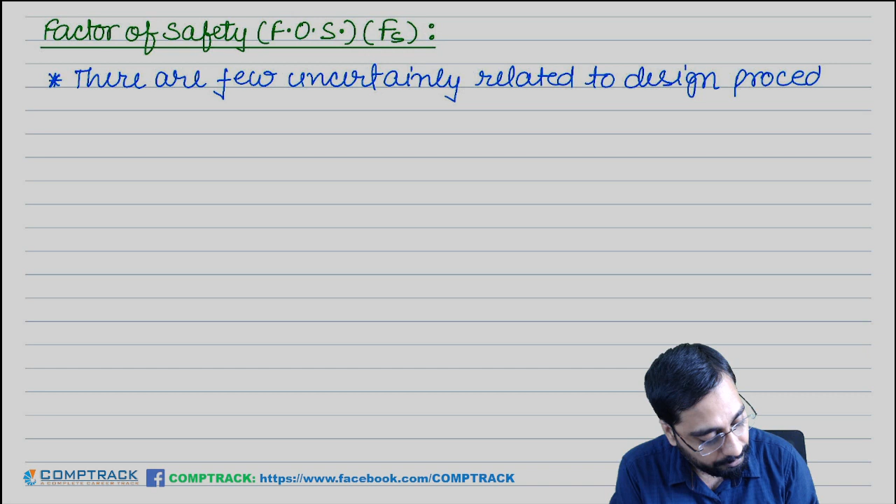There are few uncertainties related to design procedure, like first, uncertainty of load.

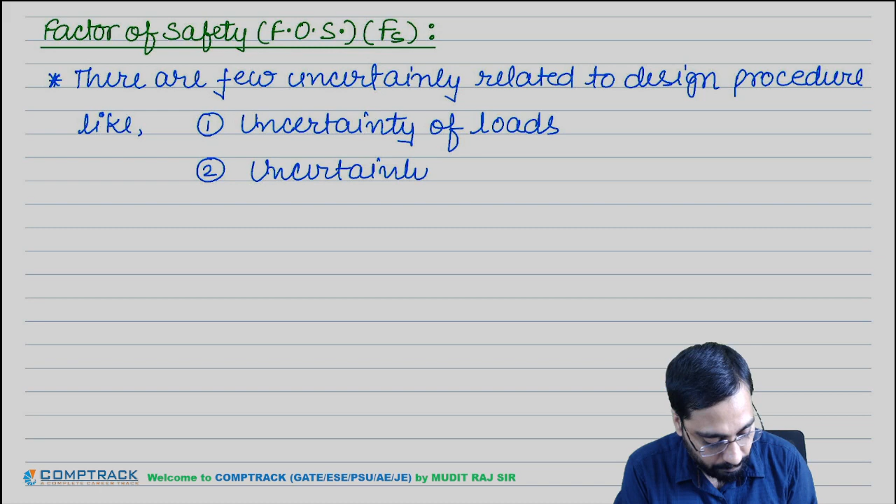Second, uncertainty of dimensions and size. Third, uncertainty of material.

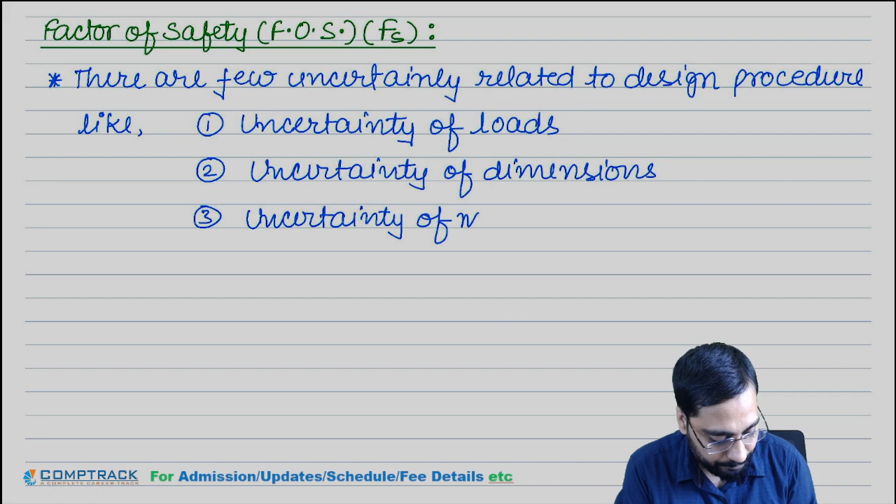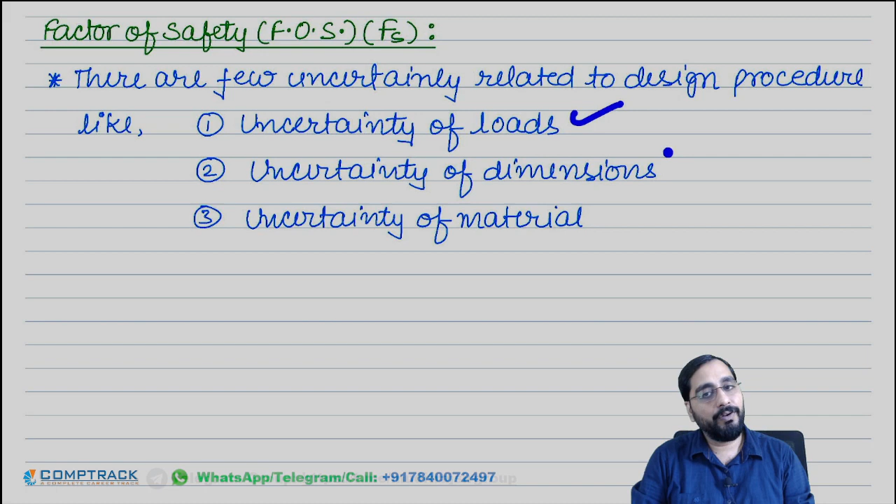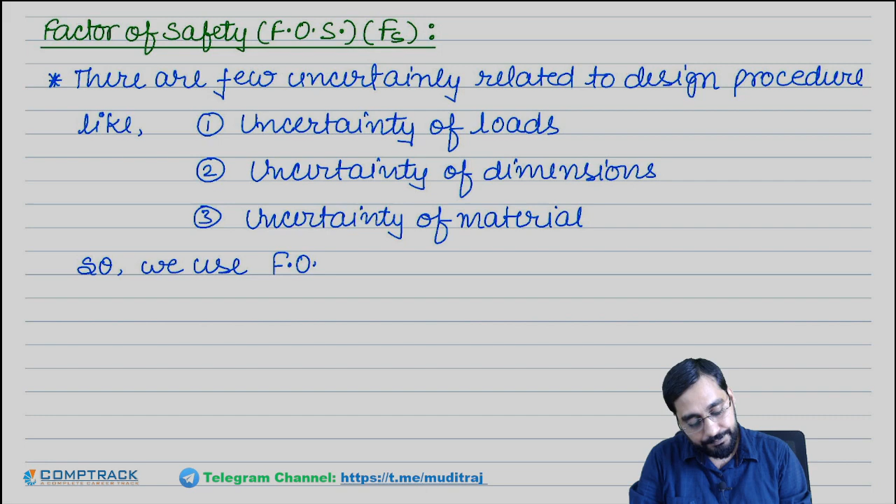So we cannot exactly predict the load, we cannot exactly manufacture the exact dimension, and we cannot have the pure material. So we use factor of safety to provide some reserve strength.

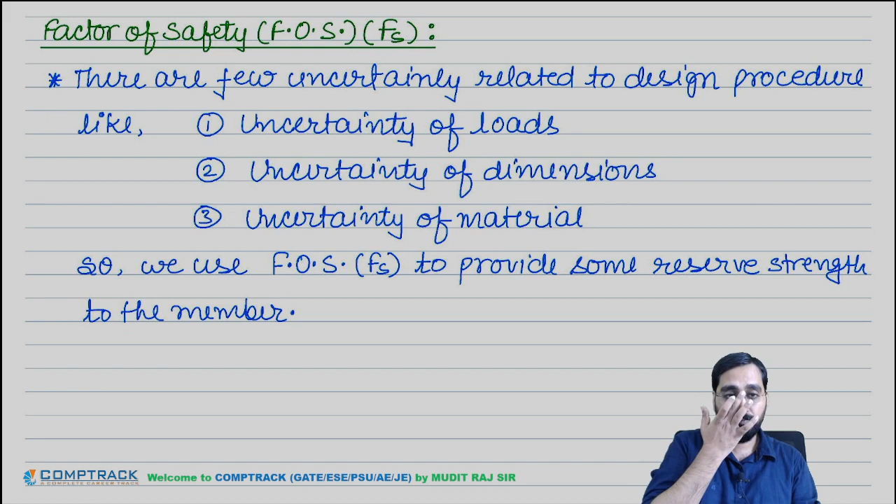To the material or member. What is the reserve strength? Reserve strength is like in your bike or car, there is some reserve condition.

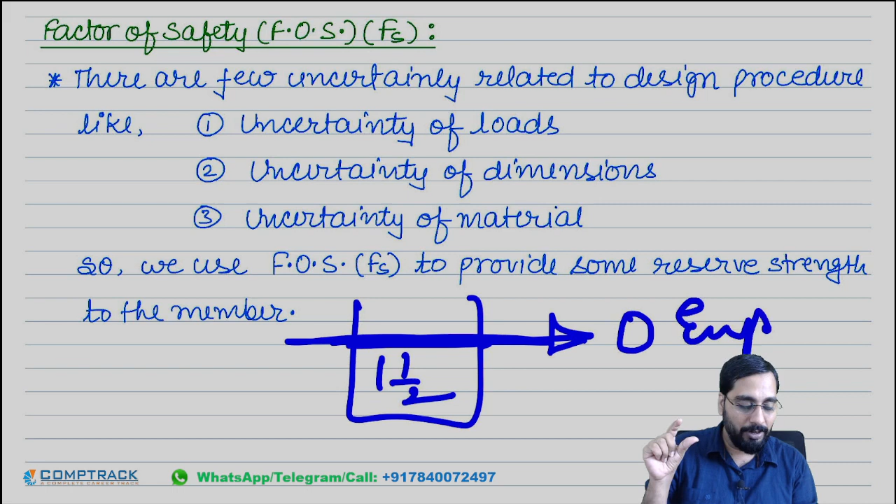Before emptying the diesel tank, some diesel will always remain, let's say 1 liter or 1.5 liter, and the meter will show zero, empty. Your car tank is empty, so this is the reserve quantity, reserve volume of the diesel or fuel inside the vehicle. So here the vehicle will count 0. So this is the reserve volume of diesel.

This much should remain, because sometimes you are on the highway and the nearest petrol pump or diesel pump is far away. So if your fixed distance is 300 kilometers and you are putting fuel for only 300 kilometers, you are a very efficient engineer. So for that there will always be some reserve.

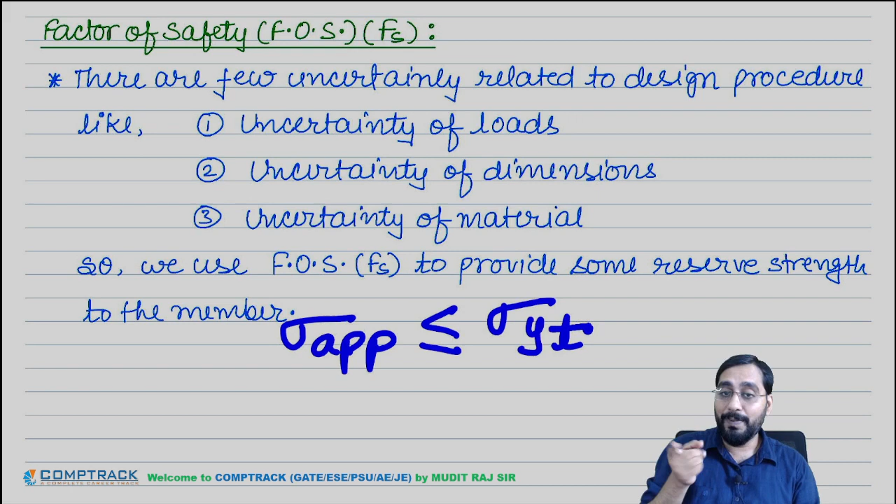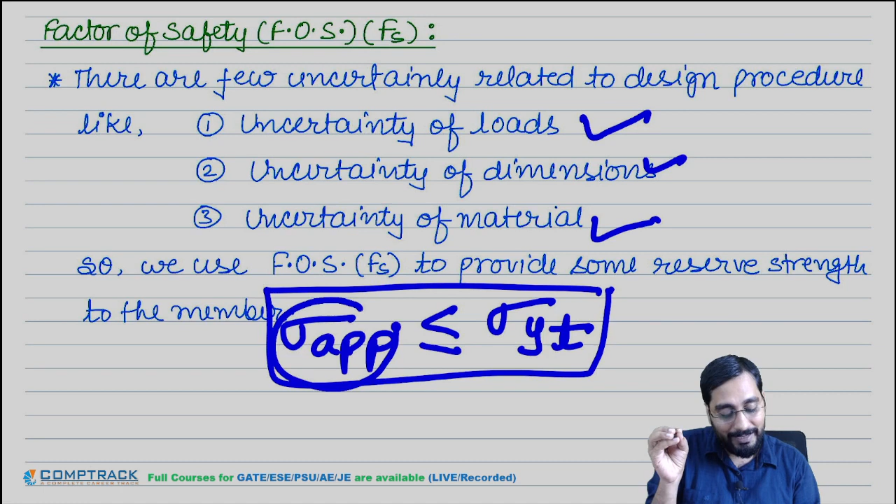So reserve strength means actually you can apply the applied stress less than or equal to, let's say for ductile material, yield strength. But due to uncertainty of load, material and dimension, we will not go up to this. We will apply stress lesser than this value.

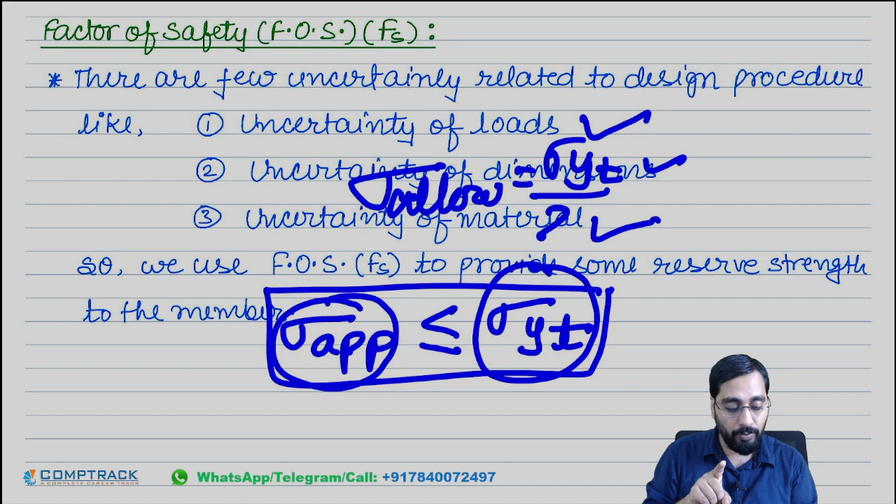So our allowable stress, the designer will set, as a designer you will set the allowable or permissible stress, let's say only sigma YT by 2. Then applied stress you can apply only up to that by 2. That's it. So for a factor of safety of 2, there will be much more safety.

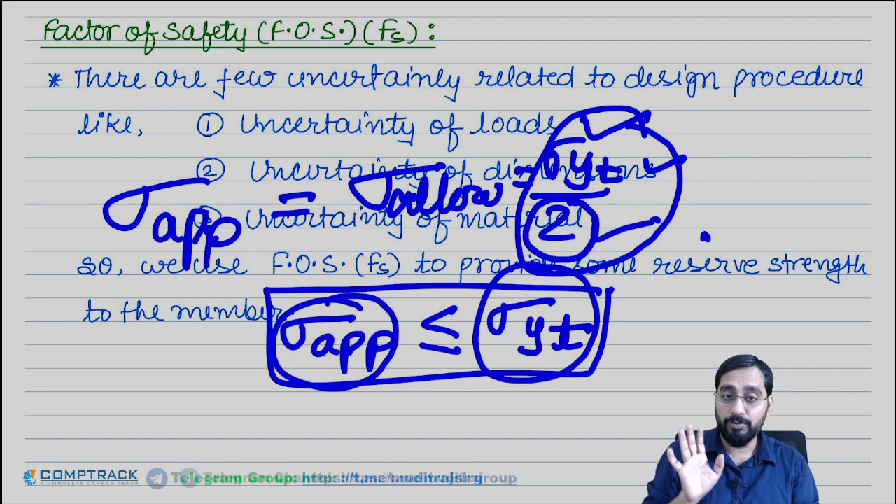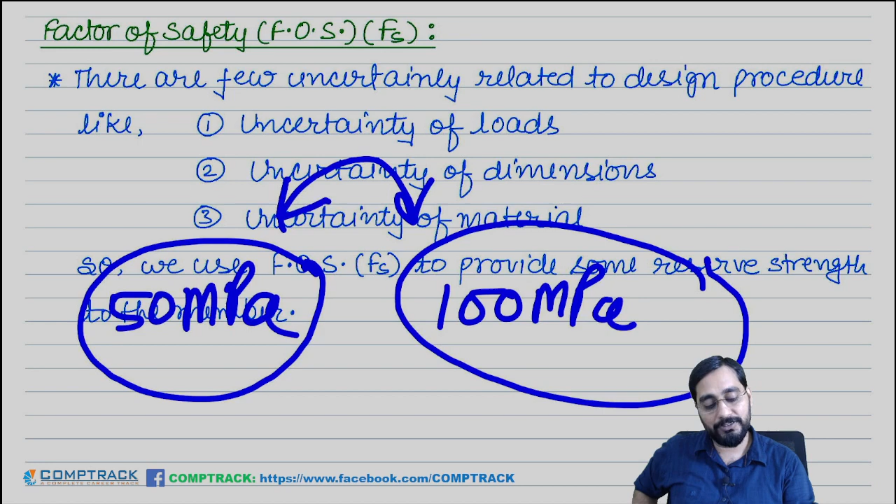Let's say you can go up to 100 megapascal, but you will be allowed only up to 50 megapascal. So the maximum up to which you can go, and what you are allowed, this difference is called your reserve strength. So here,

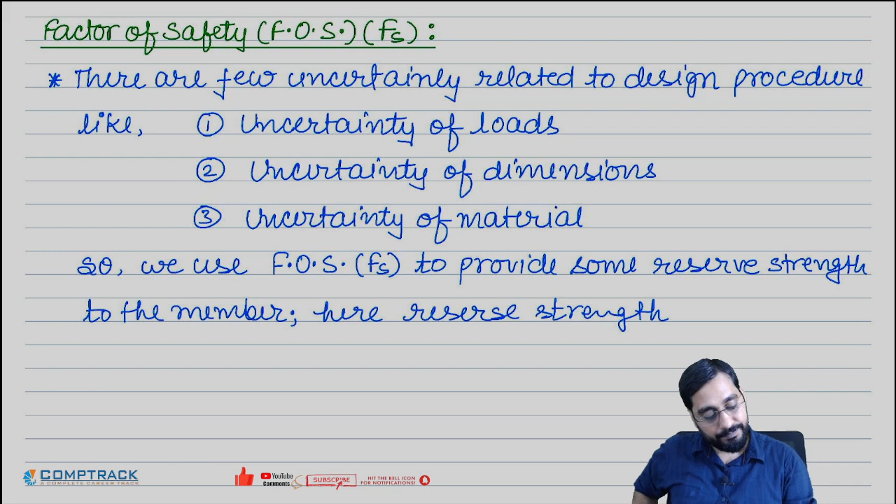reserve strength is sigma strength, or you can say maximum, minus sigma allowable. That's it.

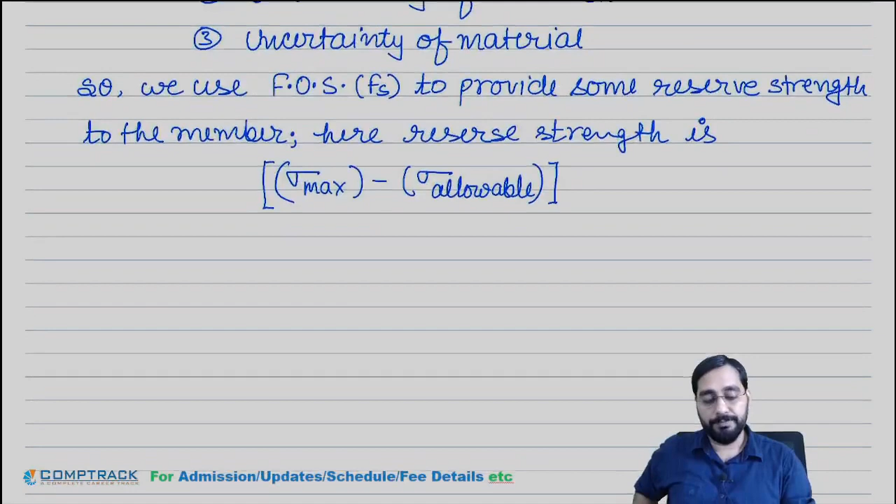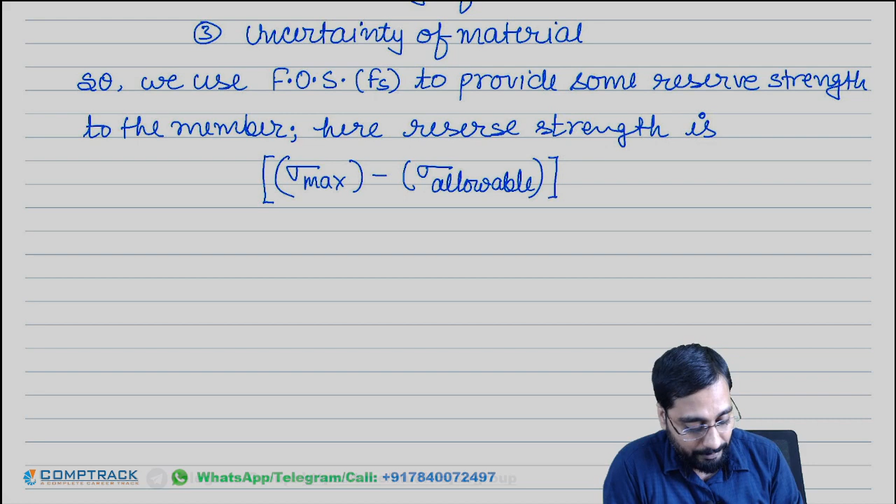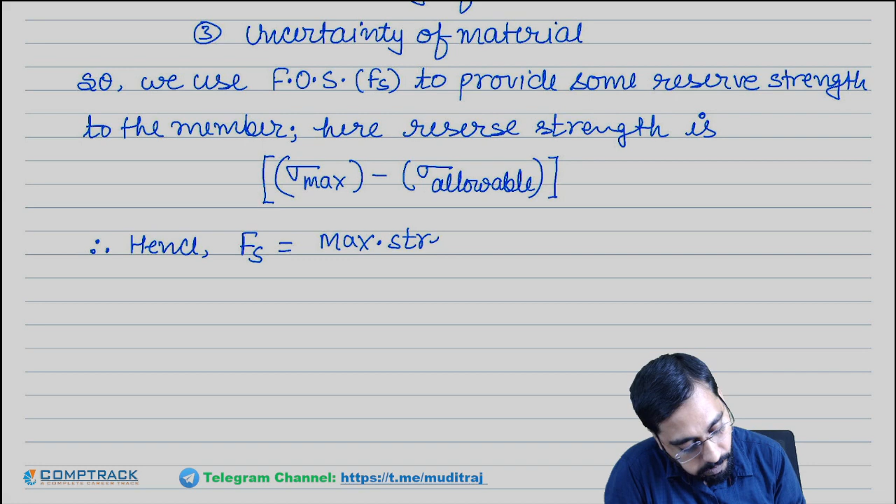Allowable. Now factor of safety. So the factor of safety formula will be given by what? Factor of safety formula will be equal to the maximum stress upon the working stress or applied stress.

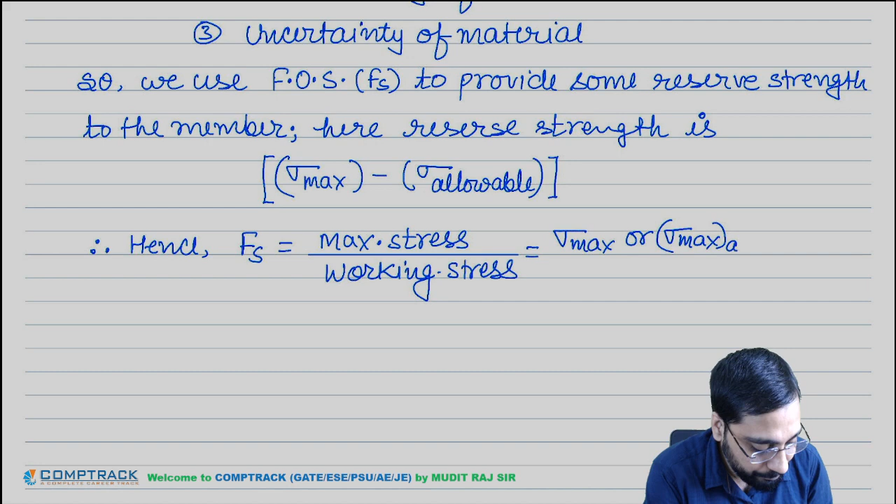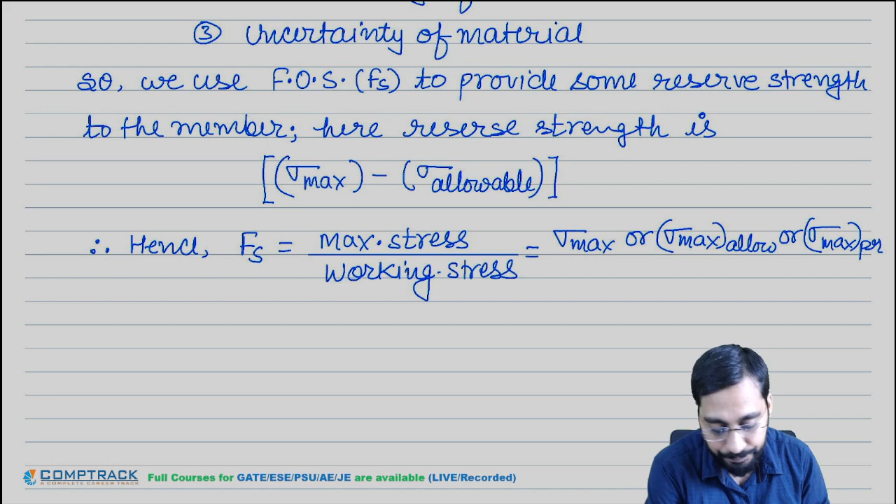or you will write sigma maximum permissible, divided by sigma working, or you can say sigma applied, or you can say sigma induced. Got the point or not?

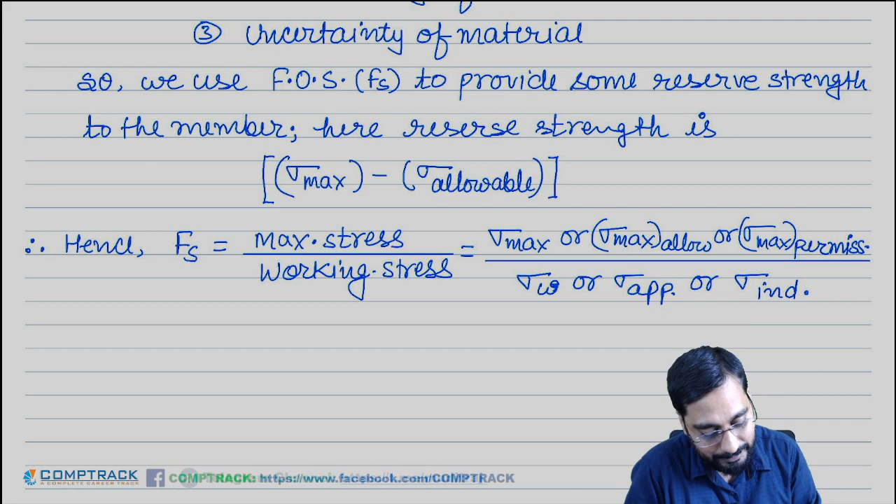Sigma induced. Okay sir, here sigma maximum is yield strength in case of ductile material. Yes, in case of ductile material, this sigma maximum will be sigma YT.

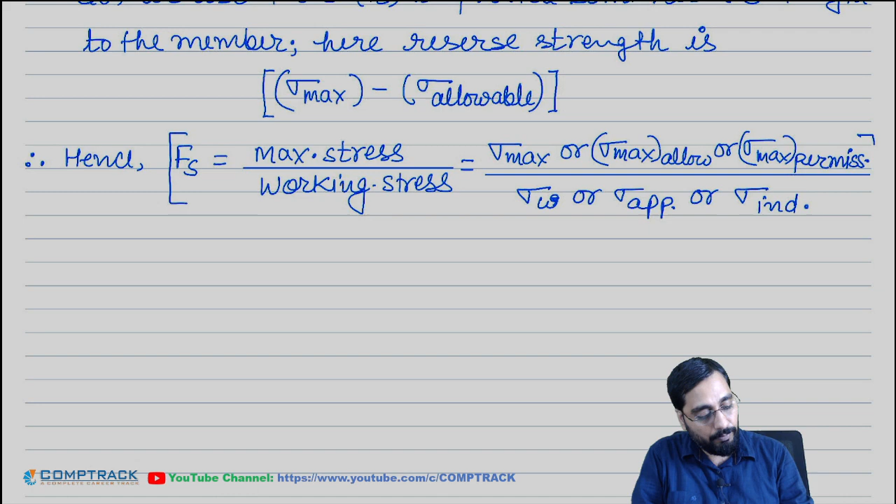So here you can see that factor of safety will be more than or equal to 1 always.

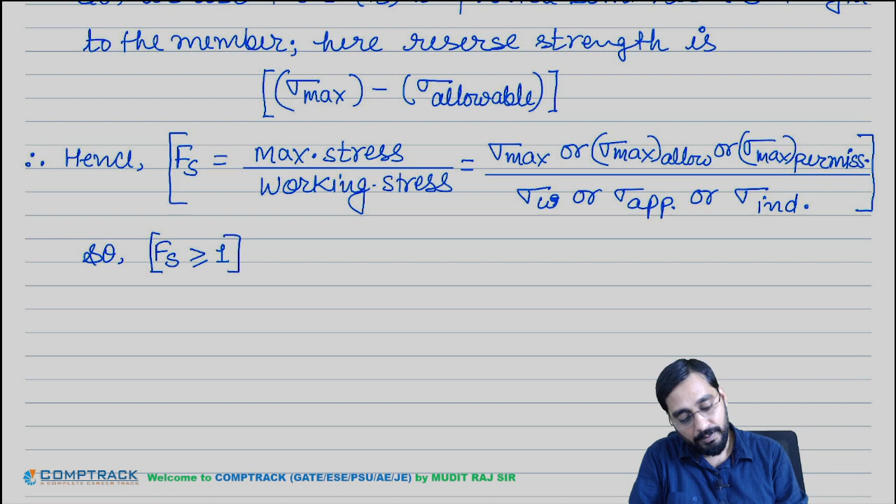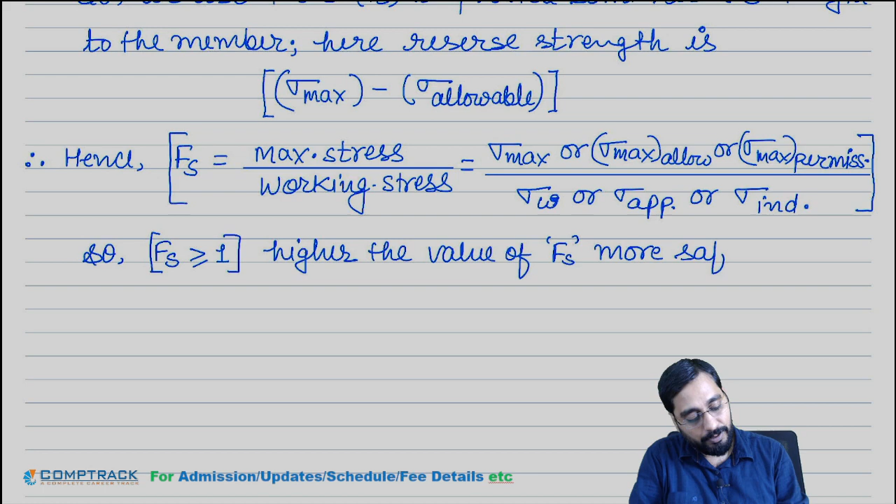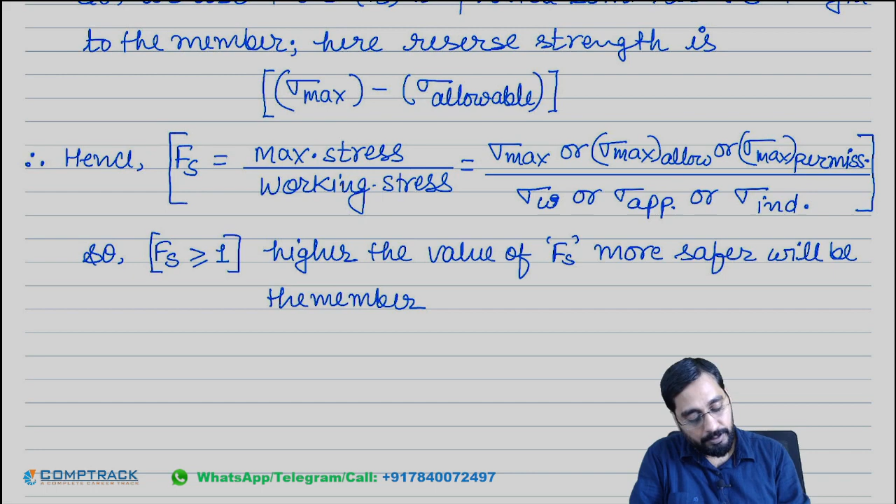Equal to 1 doesn't really make sense, but FS will be more than or equal to 1 always. Higher the value of factor of safety, more safer will be the member. Yes or no? When factor of safety will be higher, more safer will be the member or element.

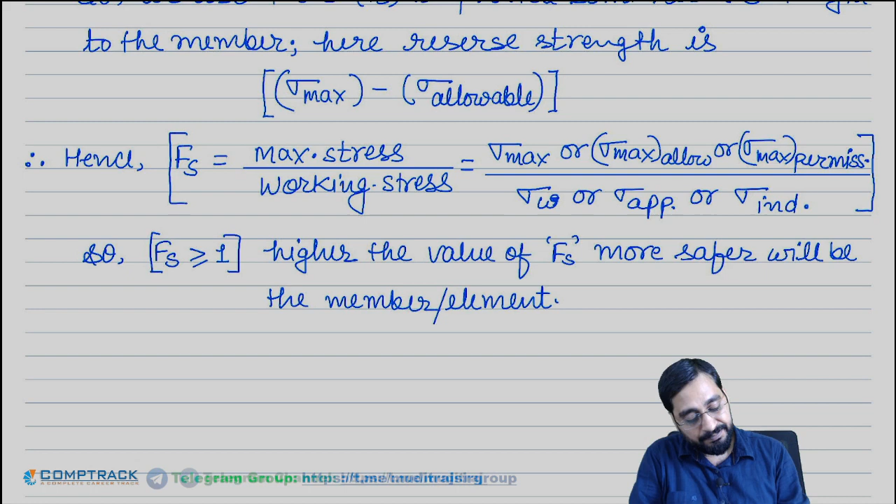No. Why? When you are increasing the factor of safety, then you will increase the dimension of the member, or you will decrease the load.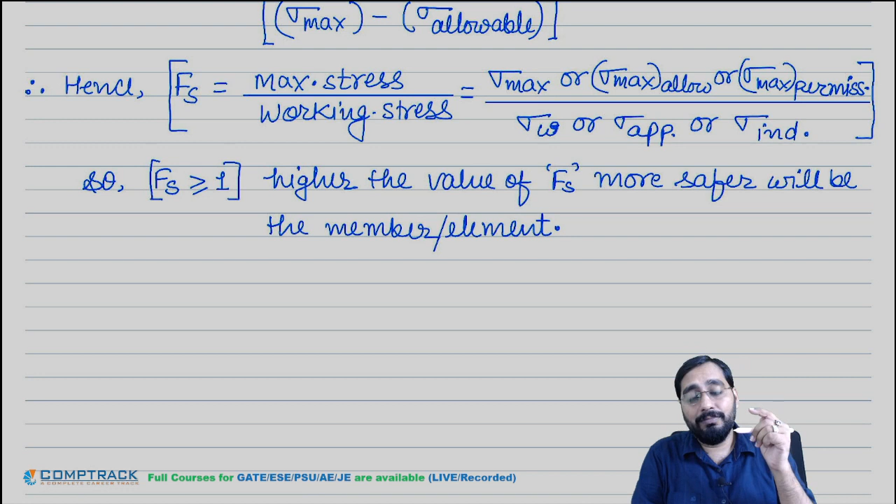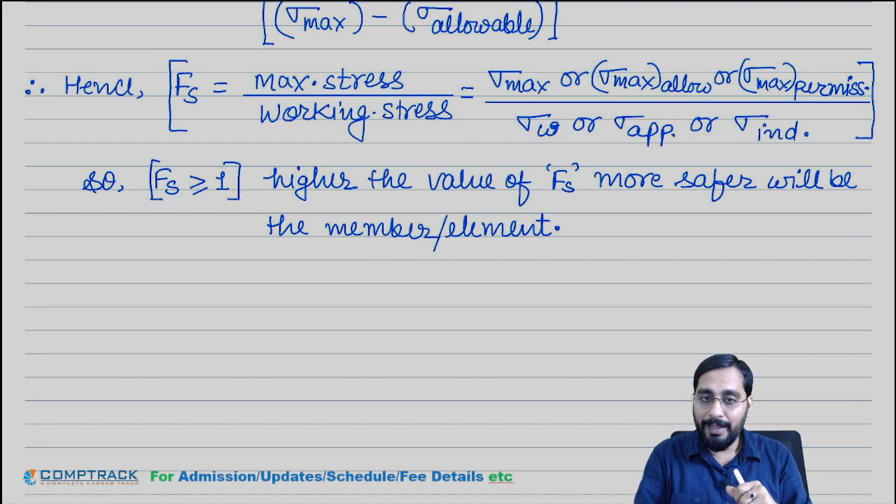Yes or no? So if load is decreased, then the process will not be efficient for us, because your machine can take only less load. And if you are increasing the dimension of the shaft or element, then more material you are using, so more cost will be there, and more weight of the machine part will be there, so mileage of the car will go down.

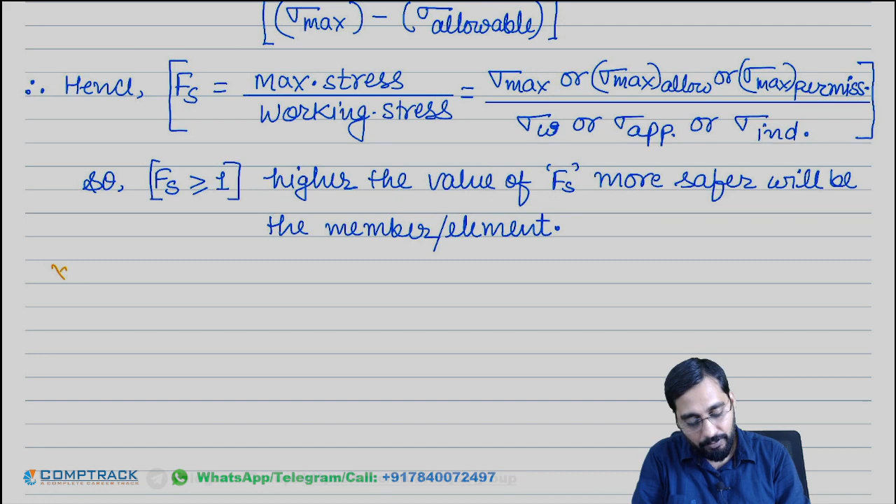Yes or no? So we cannot keep on increasing the factor of safety. So write down here, higher value of factor of safety is good, but

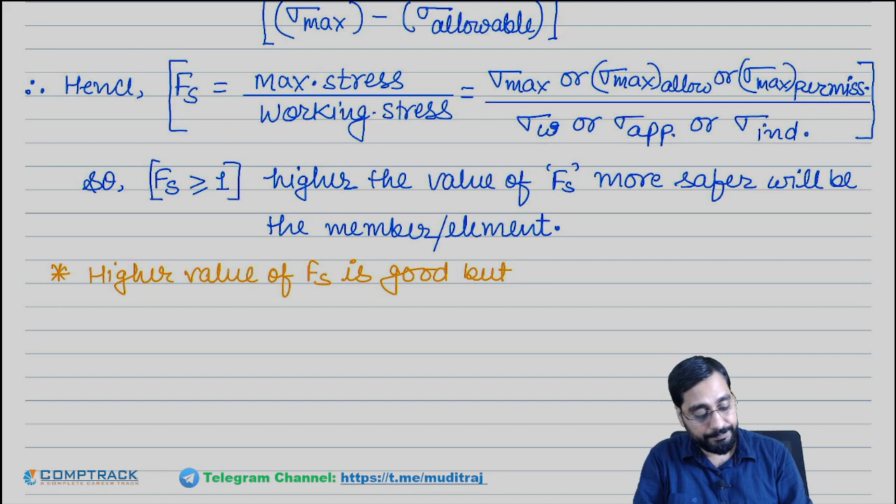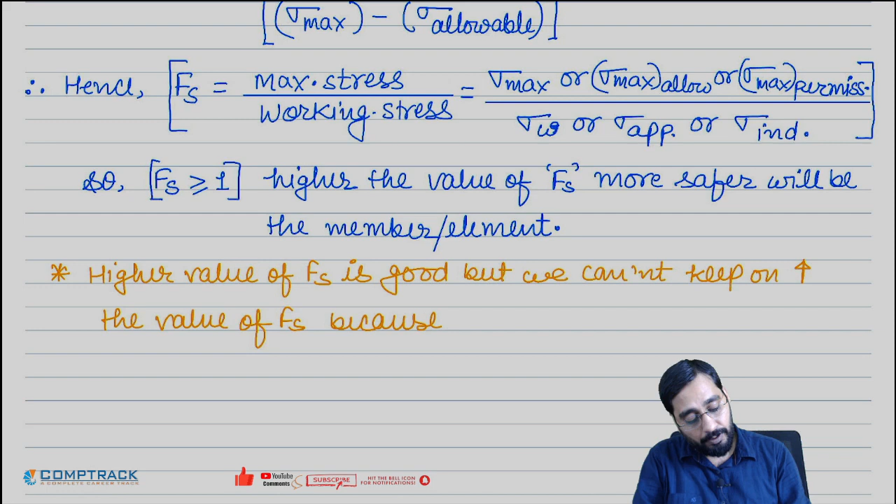we cannot keep on increasing the value of FS, because to increase FS, either increase the dimension

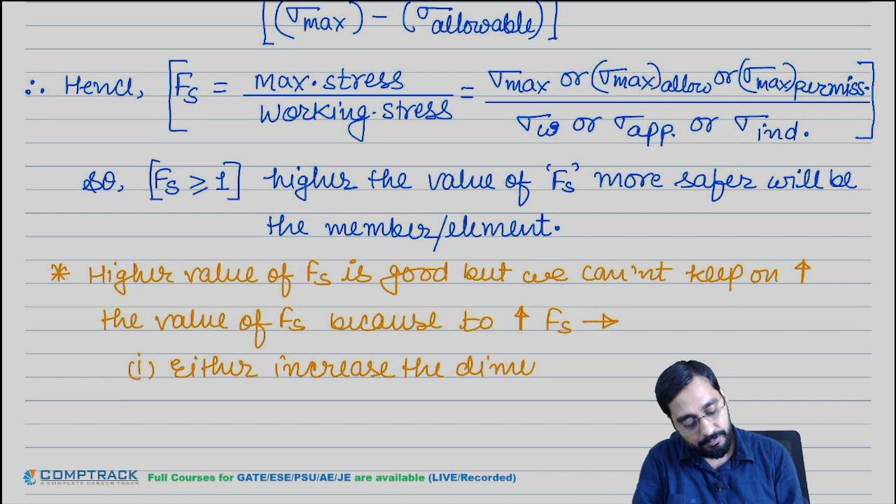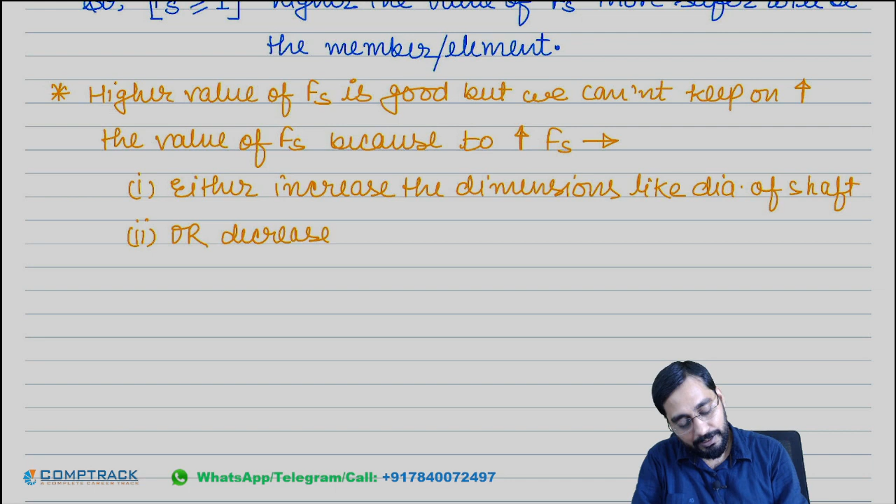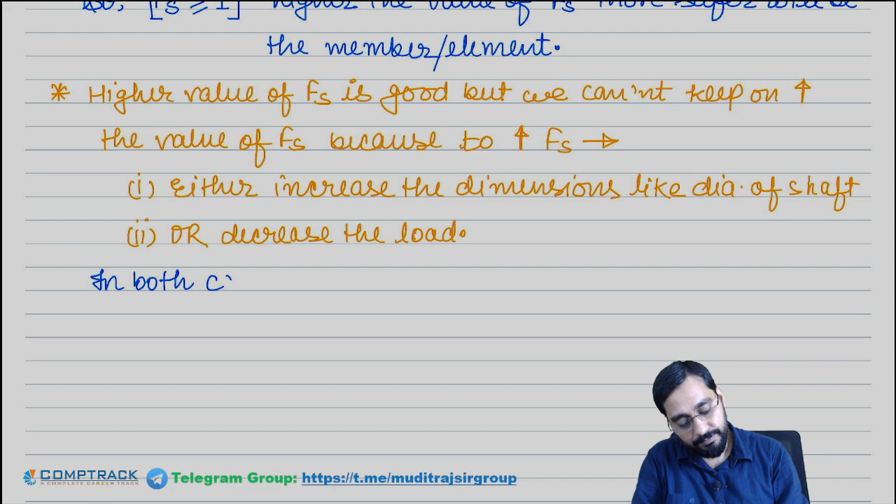like dia of shaft, or decrease the load, or decrease the load. Okay, in both cases, the process will be inefficient

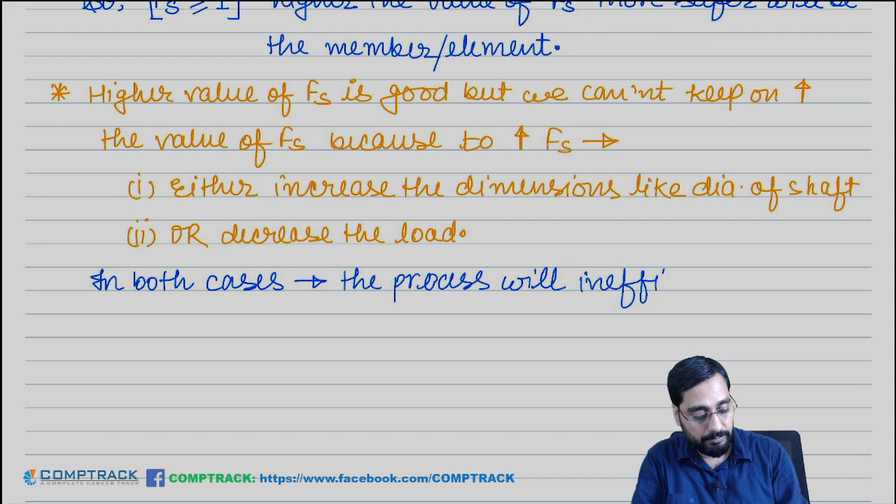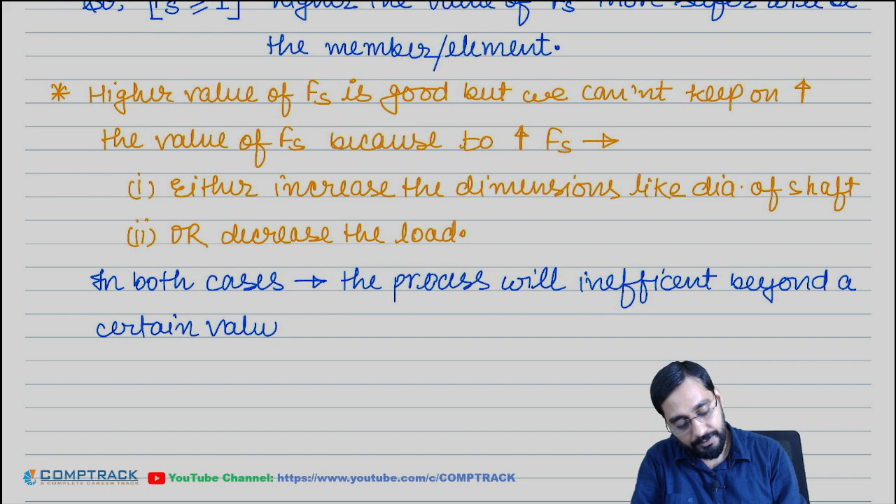beyond a certain value, as more dia, more weight, so more cost.

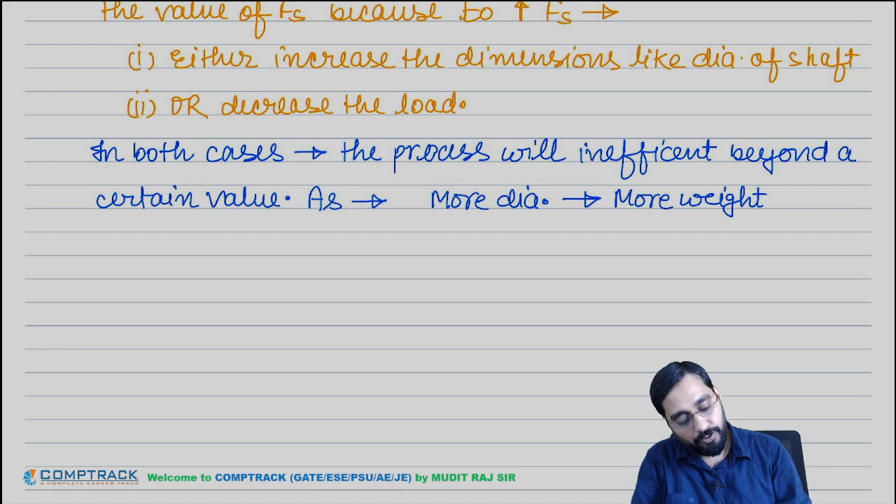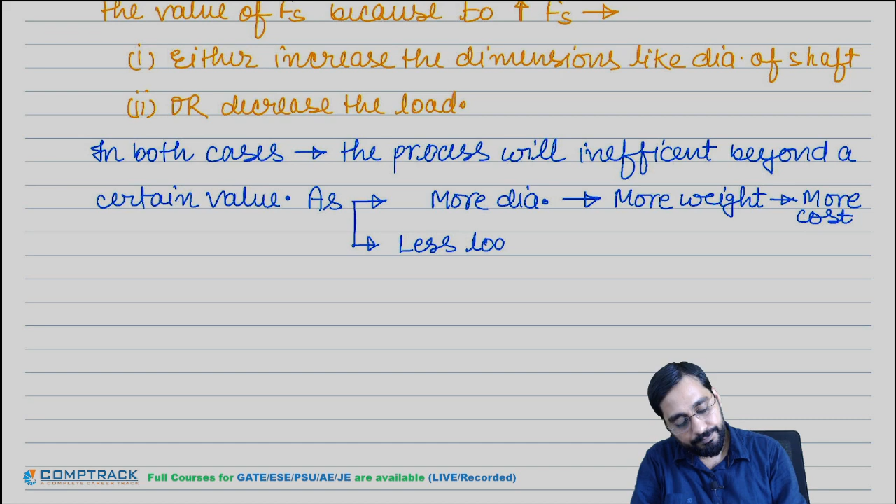Again, less load, less work output, so less profit.

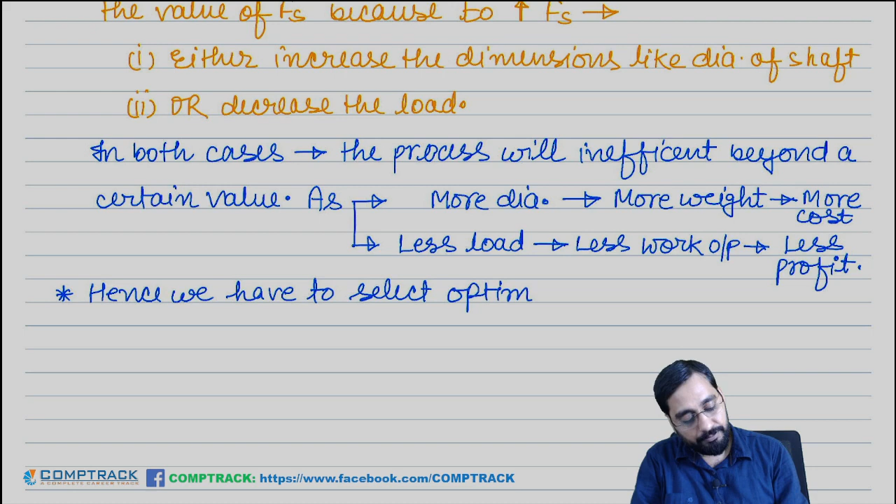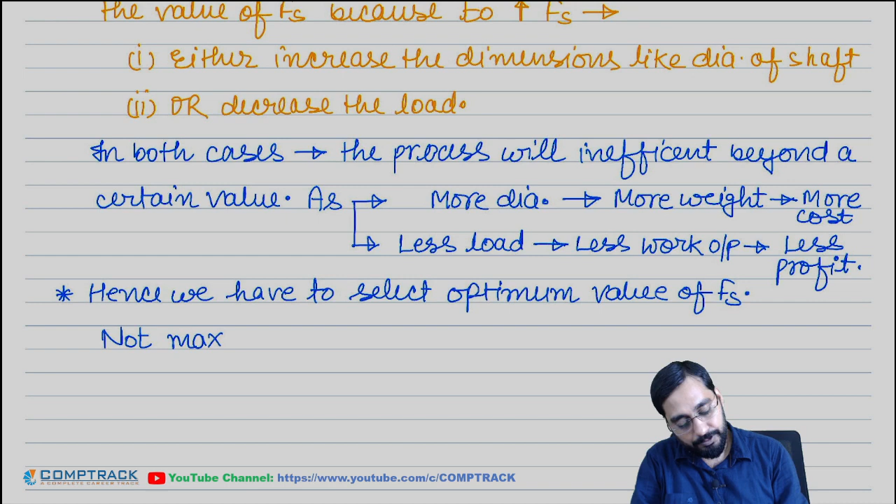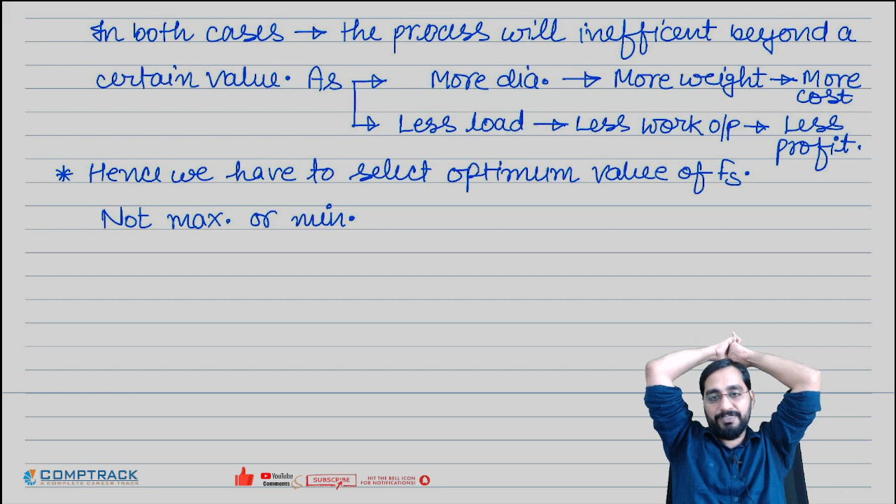Hence, we have to select optimum factor of safety, not maximum or minimum. So as a good designer, good engineer, we will go for optimum value of factor of safety. Got the point or not? Optimum value of factor of safety.

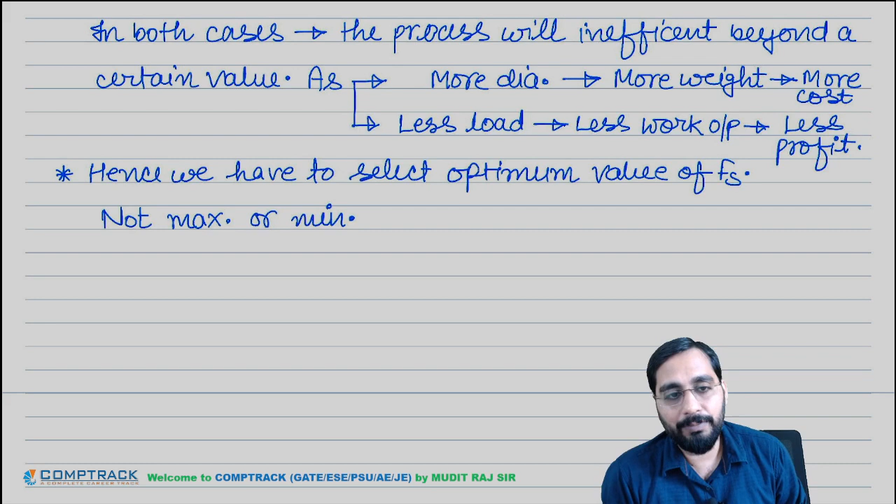So few optimum values for different loads and different materials I am going to give you. So that you have to write. First, no need to mug up these things. These are just for your idea.

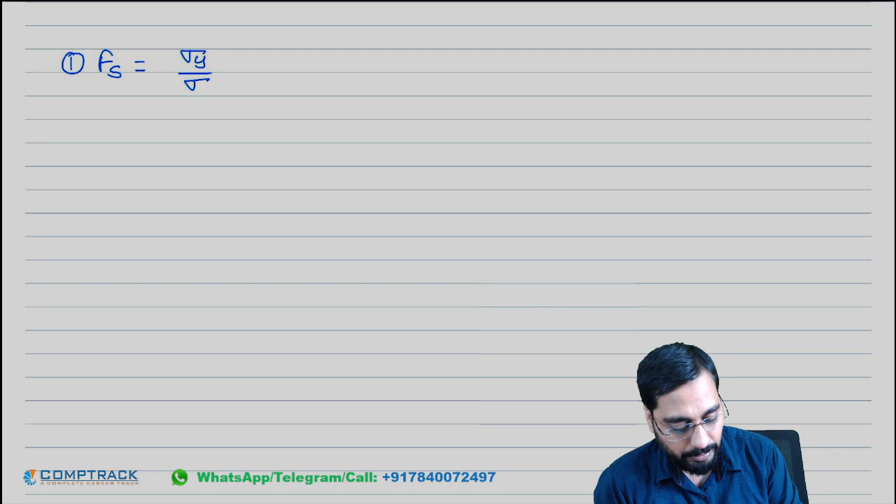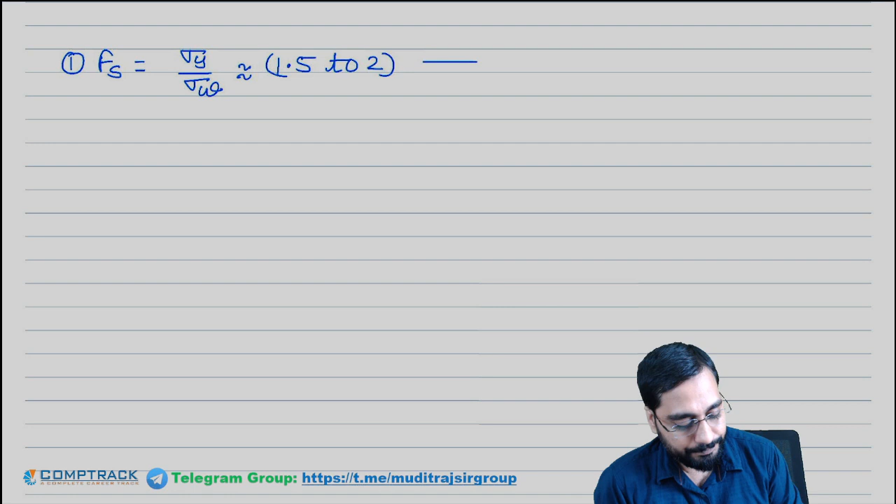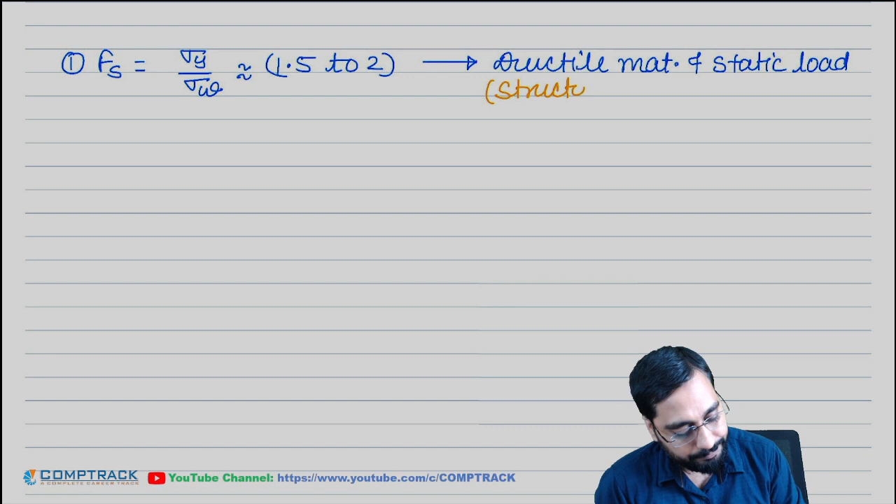Yield strength over working strength: 1.5 to 2, for ductile material and static load, like your structural steel and aluminum.

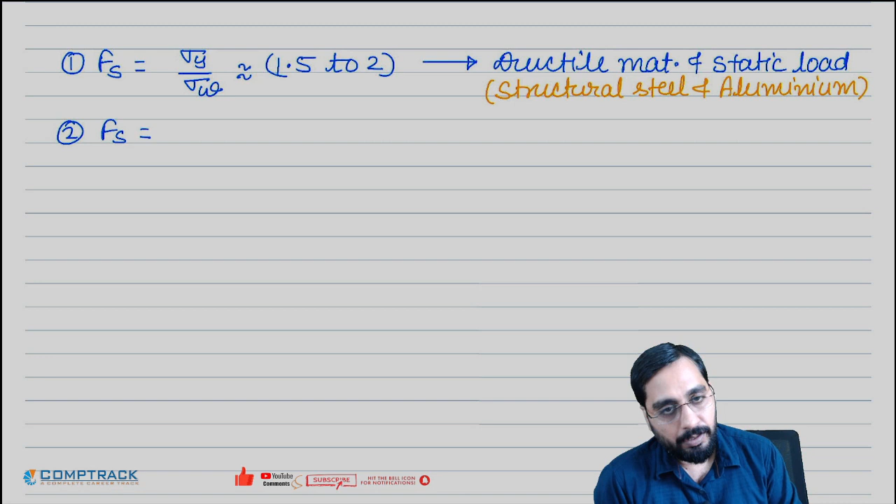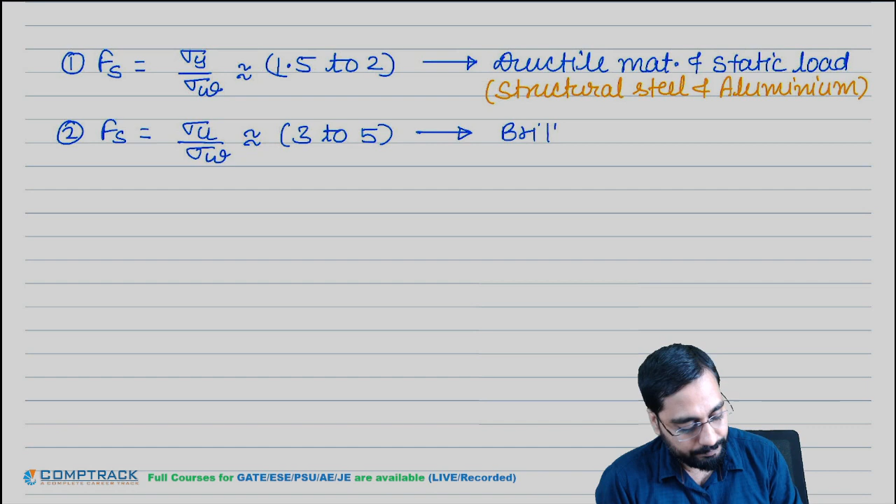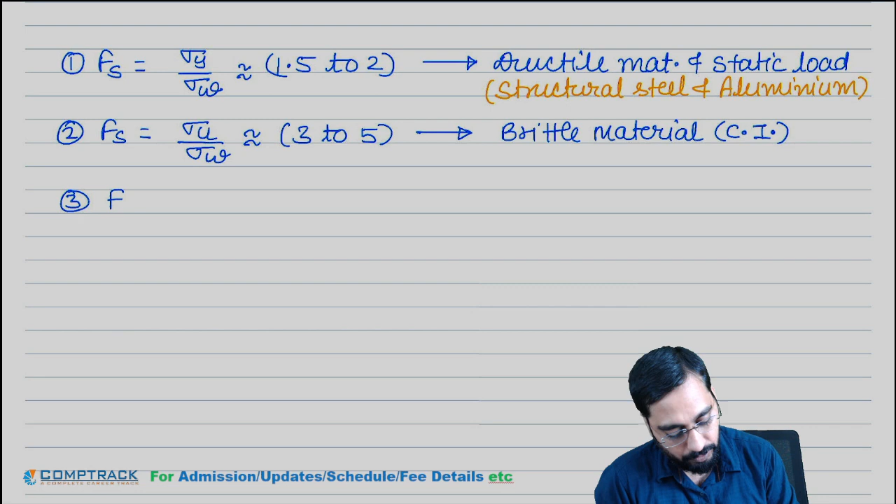Next, sigma U by sigma W: 3 to 5, for brittle material like cast iron. Because there is sudden and total failure, brittle failures are more risky,

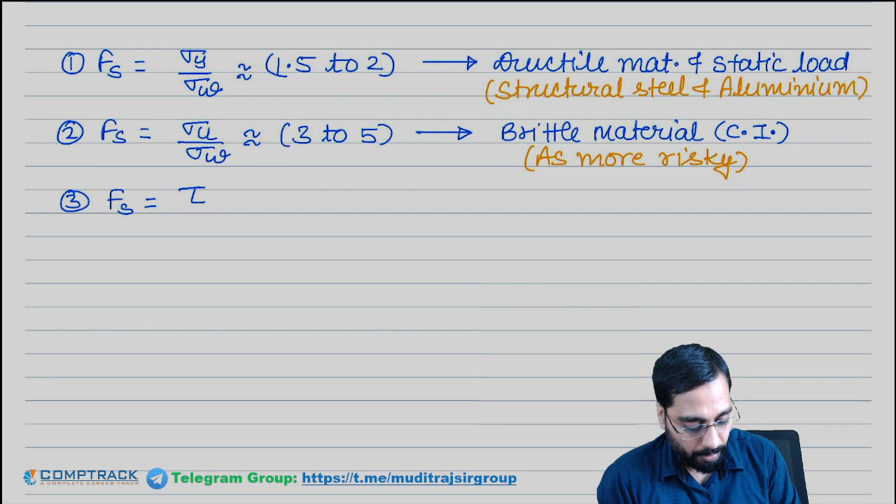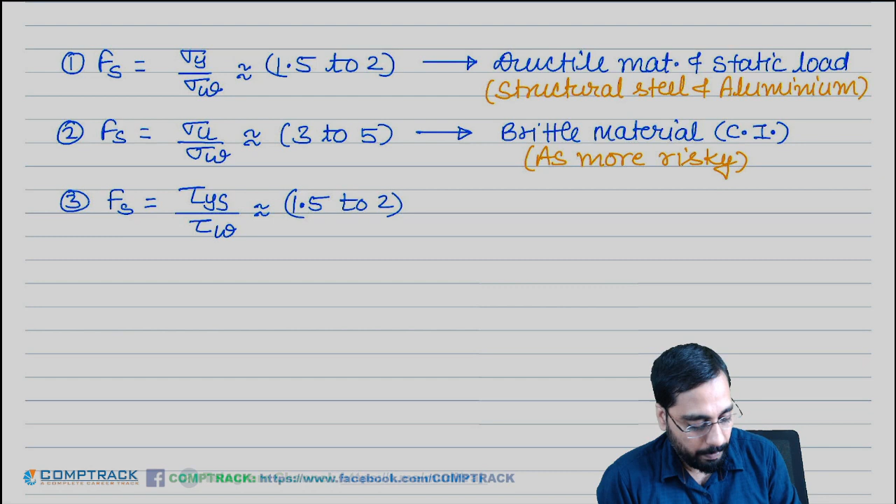as more risky, so high factor of safety is applied. 1.5 to 2 for shear loads. Generally, the yield shear strength is 50% of yield tensile strength.

Endurance strength: 1.3 to 1.5 in case of fatigue load.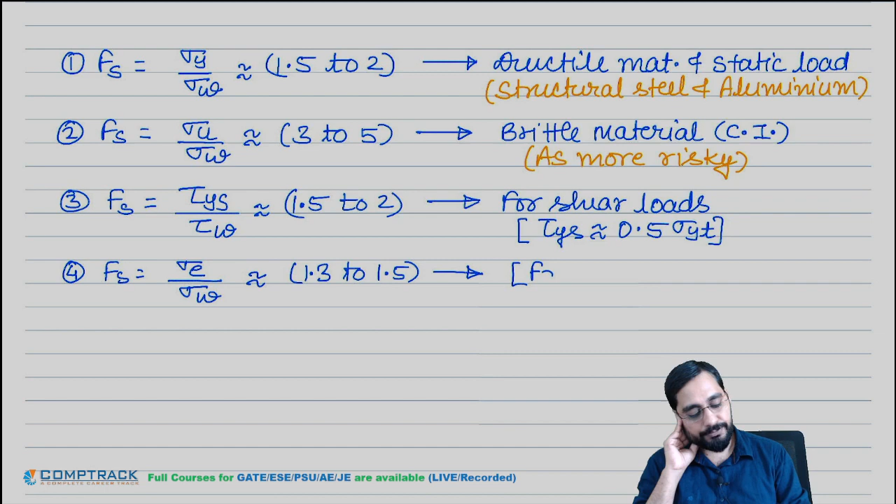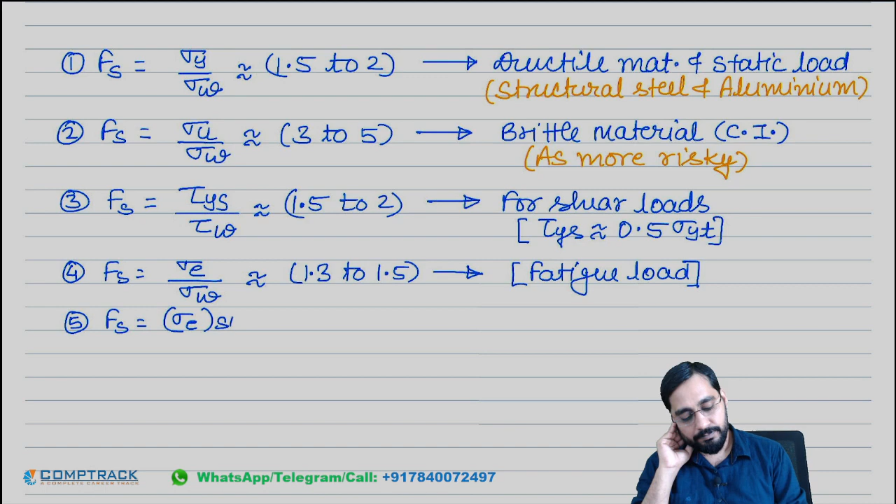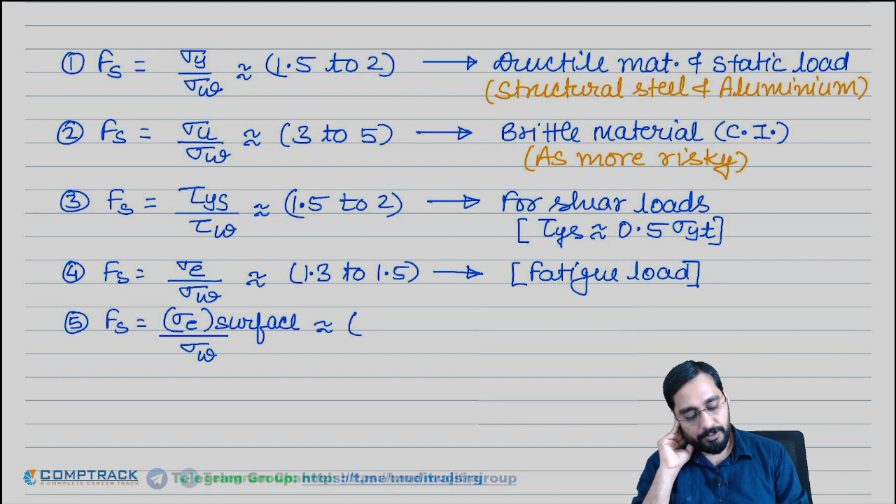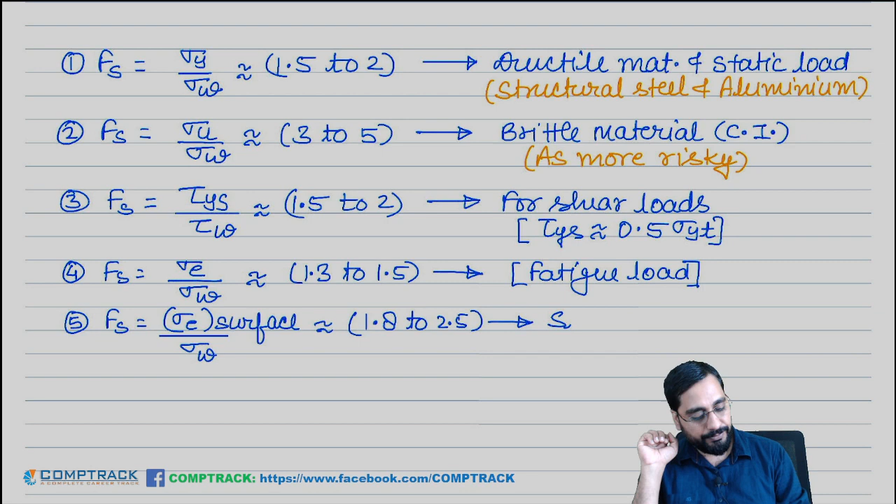Next, sigma E surface: 1.8 to 2.5 in case of surface failure. For example, pitting.

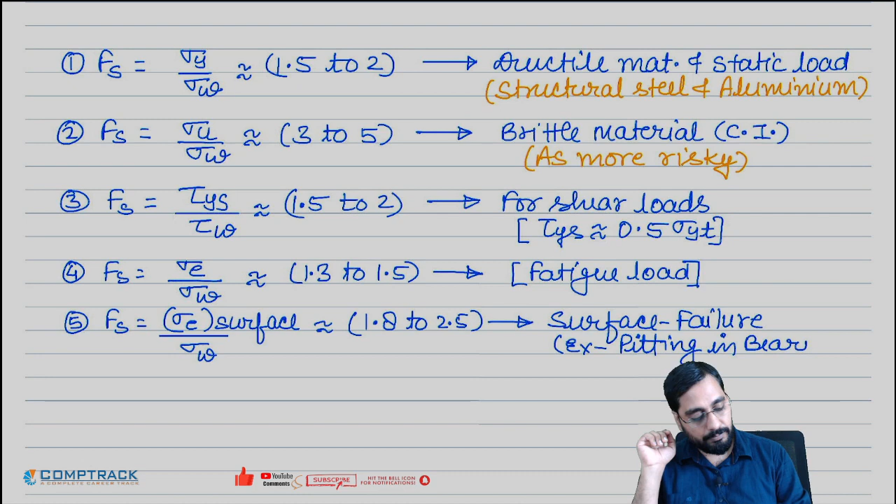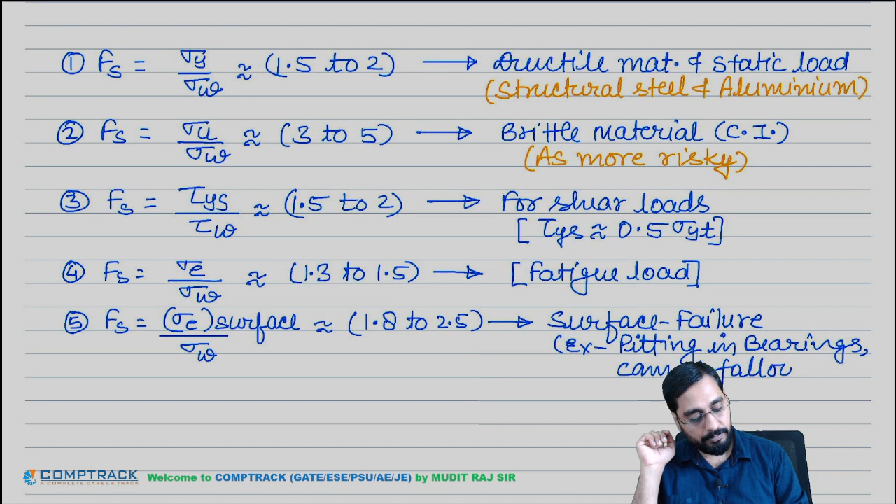In bearings, cam and followers. So cam, follower and the gears, they are subjected to surface failure. So in those cases, factor of safety is a little bit high because the speed of running will be very large.

In case of buckling, the buckling load over applied or working load: 3 to 6. Here also risk is high, so high factor of safety is used.

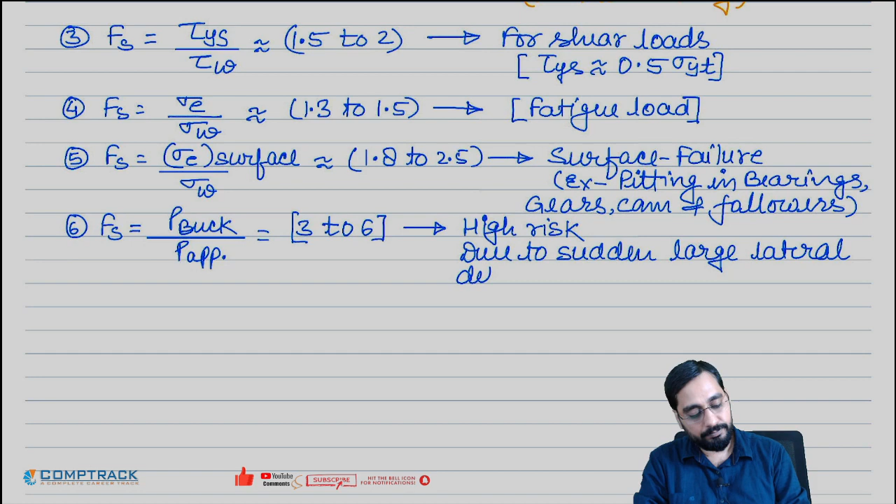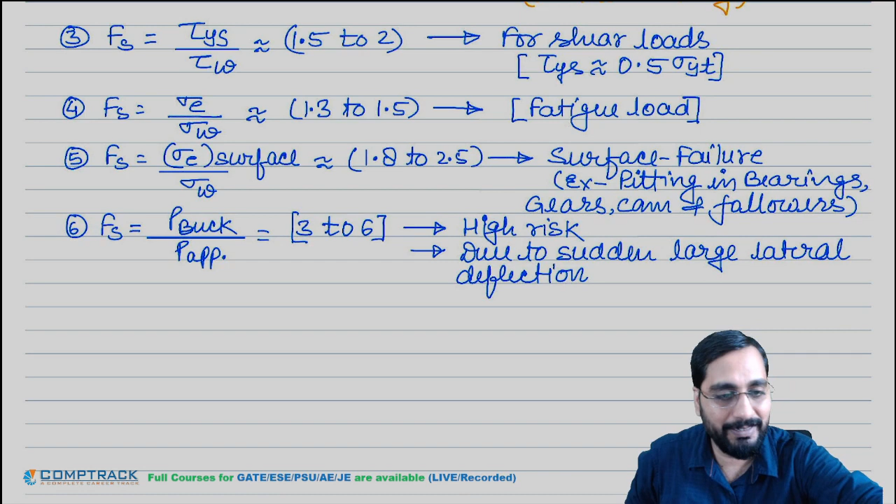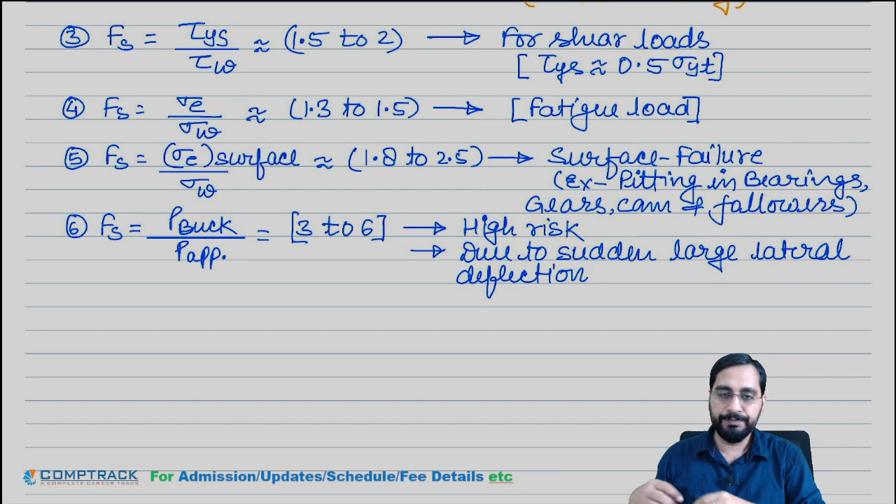So these are the few optimum values for different types of material and different types of loading. So up to this, it was very basic. Now we are actually entering into the subject.